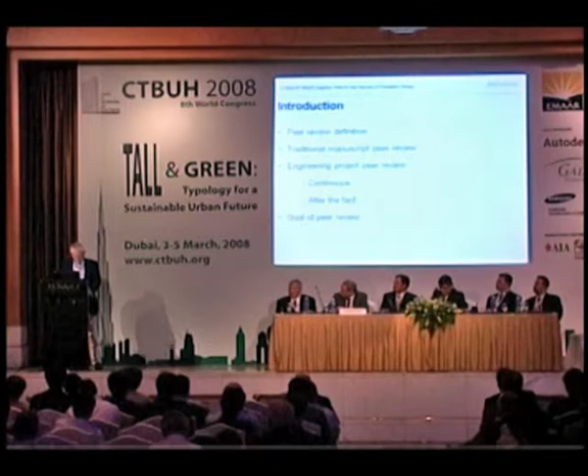At the same time, the peer reviewer must have integrity to speak his mind clearly on controversial engineering issues where there is a disagreement, even when his client prefers the view of the engineer being reviewed. This is particularly important in the geotechnical field where judgment plays a major role in arriving at the appropriate engineering solution. Why retain a peer reviewer? It is anticipated that retaining an appropriately experienced peer reviewer will help ensure that there are no major engineering mistakes or issues overlooked and the appropriate effort has been made to develop both a safe and cost-effective foundation design.

Because geotechnical engineering on which the foundation design is based is a mix of art and science, reasonable differences of opinion among geotechnical engineers based on their different experiences and training can be expected. Such potential differences can result in widely different foundation costs and performance. Appropriate peer reviews thus offer the potential to reduce both foundation costs and risks of poor foundation performance.

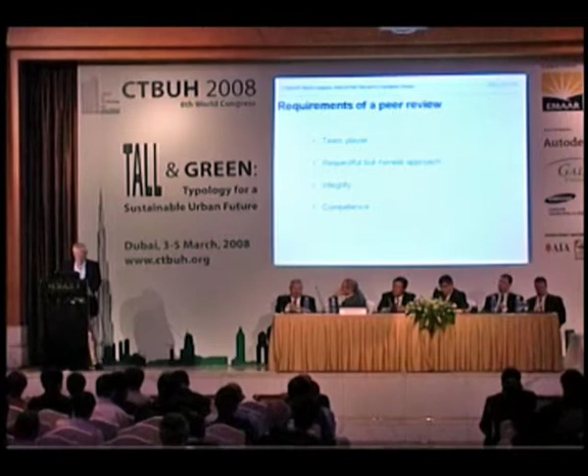Sometimes projects are set up by the developer so that the peer review consultant is retained at the same time as the geotechnical design firm. Sometimes the developer will require that the geotechnical design firm have an experienced peer reviewer as part of their team and be part of their proposal. At other times, the peer reviewer is requested after the geotechnical design is completed.

For a peer reviewer to submit a realistic budget in his proposal, it is necessary to have a well-defined scope with clarity and agreement on the goals of the peer review. The level of detail of review desired needs to be understood by both the peer reviewer and the party being reviewed, as the level of detail and level of required response will affect budget estimates of both parties.

First item is the concept designs. This is the best time for value engineering discussions so that all ideas for reducing costs may be considered early in the development stage. Subsurface exploration and laboratory testing program is the next stage. Understanding and agreement on the level of effort exerted in this stage is important.

There is a balance between the amount of geotechnical information, both field and laboratory, that can be obtained and the selection of the maximum geotechnical design criteria for most cost-effective design. Periodic desired team conference participation. It is helpful if the peer reviewer can participate in the foundation design conference meetings, workshops, along with the geotechnical engineer, structural engineer, and construction manager. The possible need for site trips for site conferences must be considered and the cost included if desired.

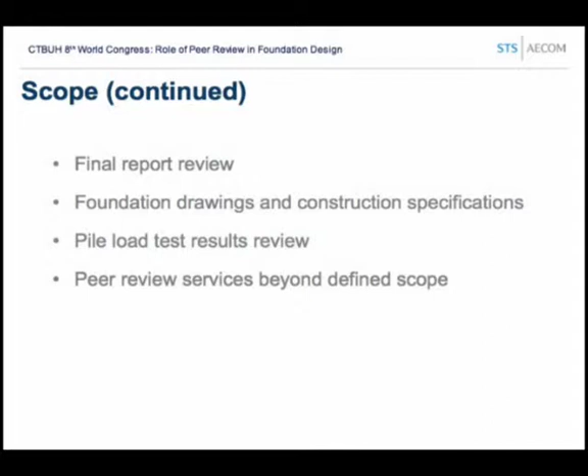Final report review. If the peer reviewer has been involved in the earlier stages as outlined above, the final report review amounts to a confirmation of what has already been agreed to. Foundation drawings and construction specifications. Since at this point all parties are in agreement with the foundation design, peer review is an opportunity to make any comments for improved clarity. If the peer reviewer has particular expertise and experience with the foundation system selected, a review of draft specification permits the opportunity for making any changes that might maximize clarity.

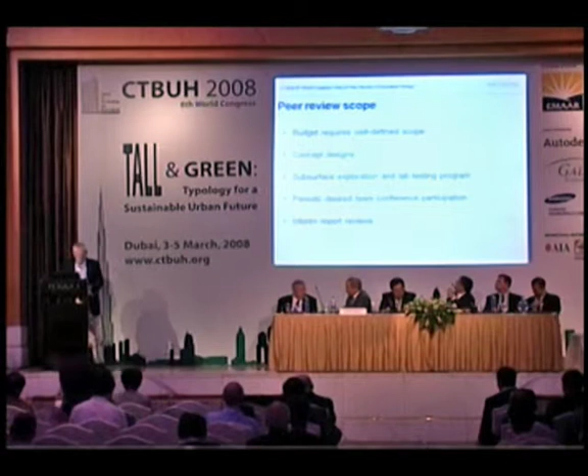Pile load test results review. Peer review of the pile load test results may be particularly important in the event that changes in foundation design may be required. Poor results may require lengthening piles at significant cost, or better than anticipated results may permit shortening piles for resulting savings.

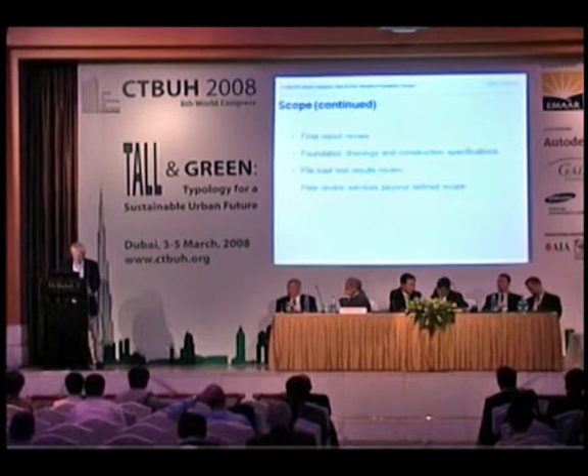Peer review services beyond defined scope. On occasion, when the peer reviewer has some particular expertise or experience that the design geotechnical engineer lacks, the peer reviewer's scope can be added to include actual design work or specifications development. This happened on one of the case histories described below.

Potential problems with peer review. Critics of peer review have concerns that competitive jealousies could obstruct objectivity and lead to efforts aimed primarily at enhancing one's own image and prestige rather than enhancing the project goals. Granted that this is a concern to guard against, it hopefully has not occurred on the projects in which the authors have been involved.

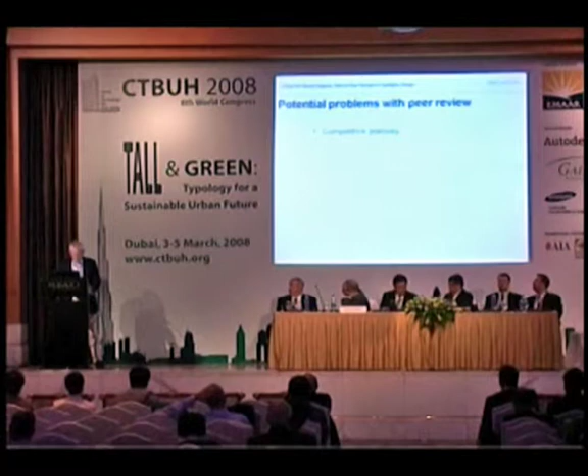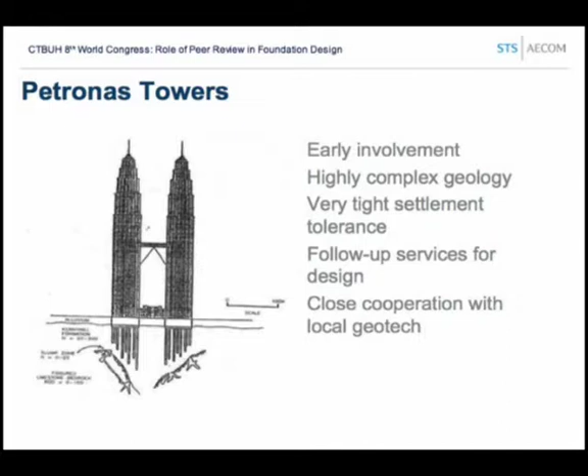The owner defined maximum allowable differential settlement across each tower of just 12 millimeters, and that made cost-effective foundation design very difficult in light of the site geology. The required tower location was immediately above a karstic limestone canyon overlain by siltstone and sandstones that had weathered to a very dense soil material. The canyon had very steep walls resulting in a relatively shallow depth to limestone on one edge of the tower and more than 200 meters at the center of the canyon between the two towers.

The peer reviewer was involved in all stages in the investigation and design as outlined above. The review involved two site meetings with the design team and local geotechnical engineering firm, and involved 6 trips working with the local geotechnical engineering firm. Details of the investigation, design, and observed performance in the structures are included in 2 papers listed in the references.

When it became clear that a major ground improvement program would be required to make safe construction at this site feasible, and due to the limited experience of the local geotechnical firm with regard to ground improvement, the services of the peer reviewer were increased to include development of a grouting program and the required ground improvement and development of specifications for the grouting program, as well as providing observation services during the 6-month grouting program.

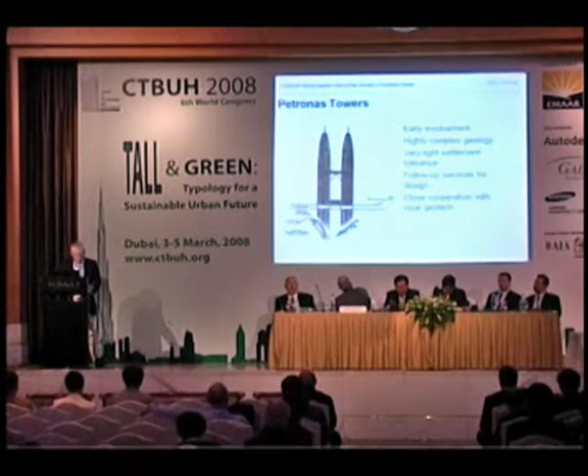This was a potential opportunity for competitive jealousies to arise, but through close cooperation with the local geotechnical engineers, any such controversies were avoided. Being involved at all stages in the investigation, testing, and design analysis helped develop the concept of variable length piles designed to accomplish the differential settlement criteria. The end result of the collaborative efforts of the parties involved was foundation performance that exceeded predictions, with total observed settlement less than predicted and maximum differential settlement of less than 12 millimeters.

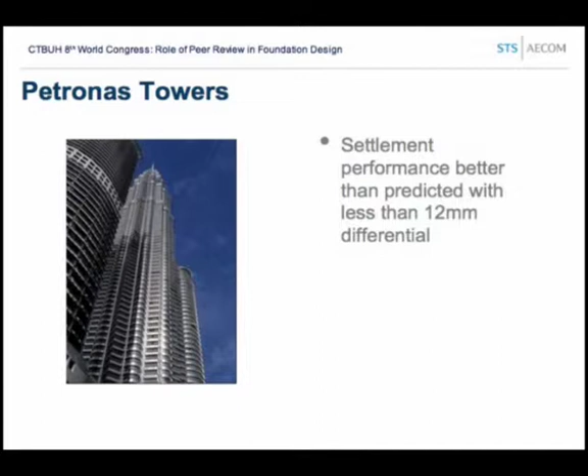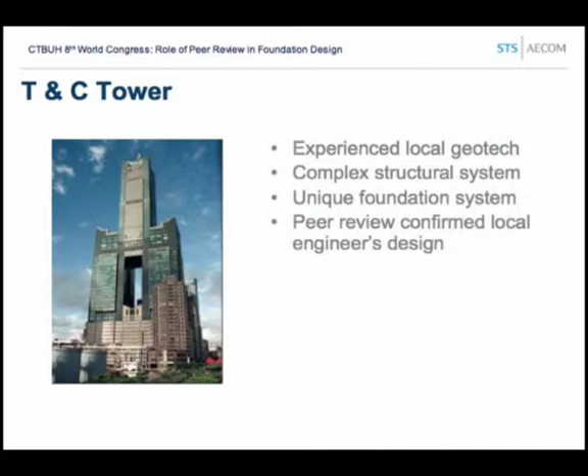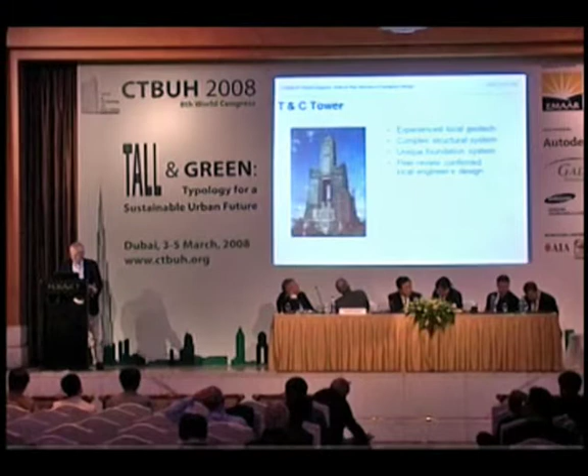Next case history is the T & C Tower, and I'll run through this briefly because I know we're short on time. Both this project and the next one, which is Taipei 101, had a very experienced local geotechnical engineer involved, and the peer reviewers were called in after the foundation design was basically completed. Fortunately, because of the competence and experience of the local geotechnical engineer, the basic designs were approved, and the projects were completed successfully. And in the case of the Taipei 101, they withstood a major earthquake during construction.

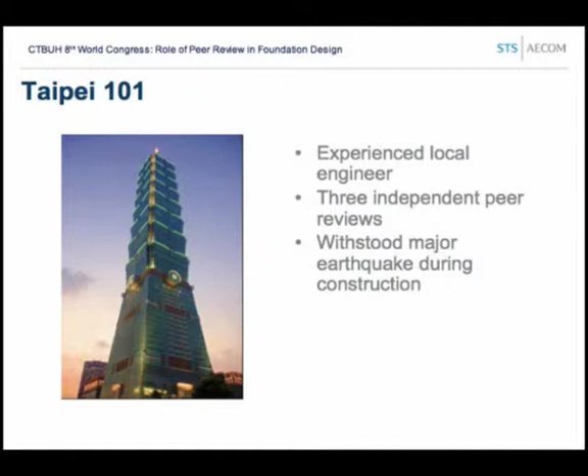Burj Dubai, that's what everybody's interested in. We all know it's unprecedented. It's the tallest building in the world, even as it stands. We don't call it the tallest building in the world yet because it's not completed, but it is certainly the tallest building in the world as it stands today.

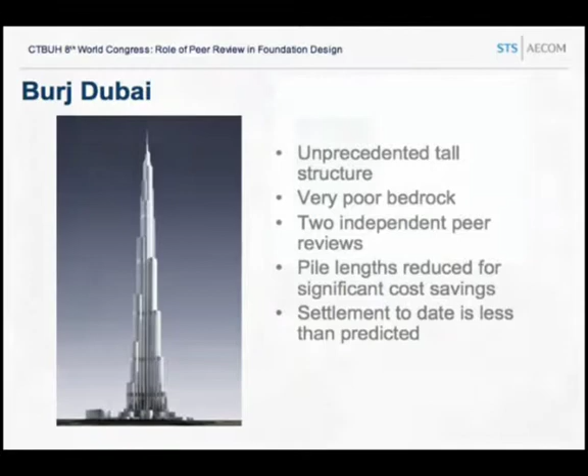It's built in an area where the foundations consist of relatively soft rock of variable strength and compressibility. The design geotechnical engineer brought on board an internationally recognized consultant to participate in the foundation investigation right from the beginning. In addition, the design architect and structural engineer retained their own geotechnical peer review consultant with whom they had many years of successful experience working together.

Both peer review consultants were involved from the beginning of the investigation and participated in design review conferences either by phone or in person. Major issues for review were the rock properties to use in the design friction and bearing, including the rock modulus for settlement prediction, the percent of load carried by the mat, and the length of piles required for adequate bearing capacity and tolerable settlement. Full-scale pile load tests were used to confirm design assumptions.

Through the process of peer reviews, it was possible to reduce the pile length modestly at significant cost savings. The pile load tests confirmed the conservatism of the design assumptions. At the time of writing this paper, with 80% of the total load in place, the observed settlements are below the most optimistic predictions of both the geotechnical design engineer and both peer review consultants. Clients always like to hear that the settlements are less than predicted, and we're very fortunate they are.

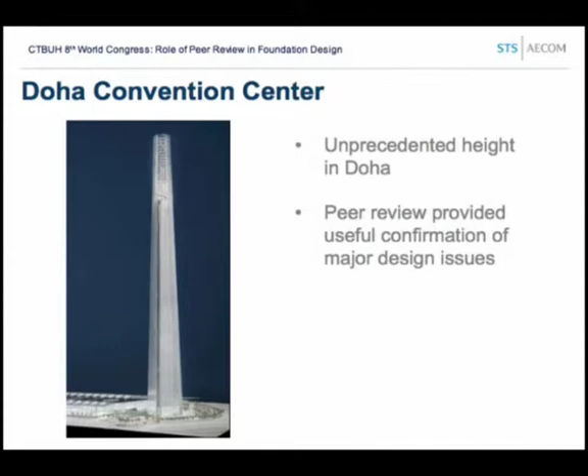The Doha Convention Center is a project that's just really beginning construction at this point. It's scheduled to be 550 meters tall, and as such will be the world's second tallest building. Proposals were requested by the construction manager for both geotechnical engineering design services and peer review services. STS Consultants Limited in their Dubai office was selected as the geotechnical engineering design consultant with a different internationally recognized

geotechnical peer review consultant. Thus, the peer review consultant has been able to comment on the different designs, on the different stages of foundation investigation, testing, and design, and is involved in most of the stages described at the beginning of the paper. We believe this review has been important and has permitted responses and modifications to be made while

the project is ongoing. The foundation system is a core mat with 4 smaller mats supporting super columns at the corners of the core. All mats are supported on bored piles. At the time of the writing of the paper, the pile testing program had been completed in the convention center and has now also been completed in the tower. Production pile installation is nearing completion in the convention center and will commence shortly in the tower.

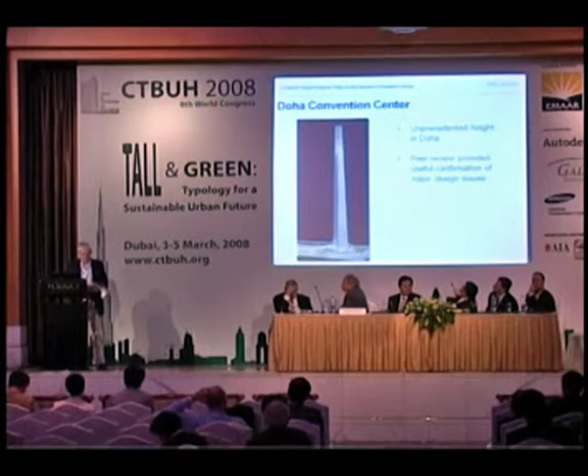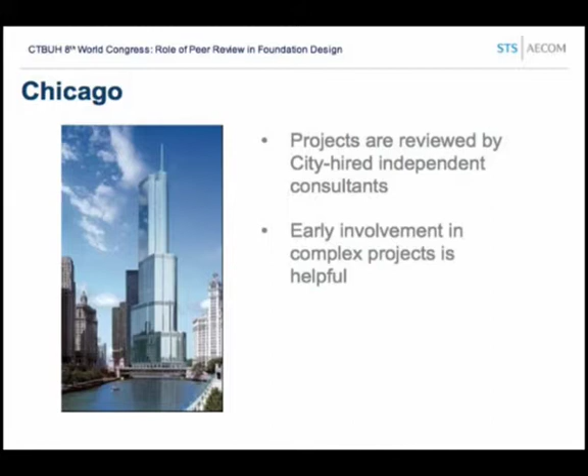Chicago. I couldn't give this talk without talking about Chicago. Along with New York and Dubai, Chicago is known as the skyscraper city, where at one time the city had 3 of the 4 tallest buildings in the world. Chicago has lost its title as having the world's tallest building, but is still building very tall buildings like the Trump Tower. In recent years, the city has installed a peer review process which the developer actually pays for, at

least in part. In the geotechnical and foundation peer review section, the reviews have often been performed after the foundation investigation and geotechnical report have been submitted for final foundation design approval. When the peer reviewer disagrees with the geotechnical engineer at this late stage and may want additional work done, it can be embarrassing for the geotechnical engineer who has to go back to the owner or developer for additional funds and explain the required delays.

Thus, this after-the-fact review is much less desirable than reviews which can be made early enough to be included in the investigation cost projections. Efforts are now being made to involve the peer reviewer at an earlier stage for his input if it should differ from the design geotechnical engineer's. Usually with the recent tall building projects, variations are required to exceed code values. This makes it even more important to include the peer reviewer early on with the request for code variance.

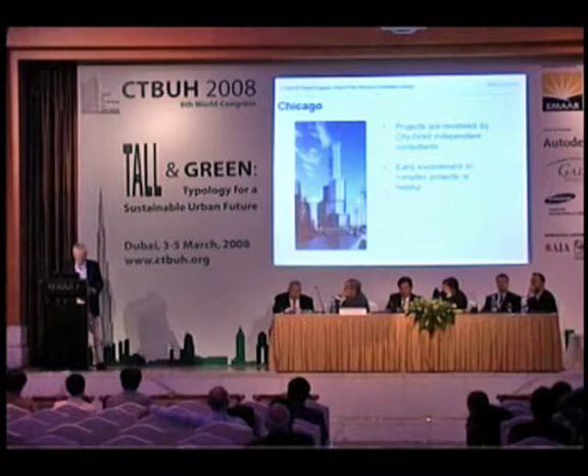Currently, the potentially tallest building in North America is under construction, and the city peer reviewer has been involved, sometimes informally, almost from the beginning. This approach leads to fewer surprises and happier clients down the road.

Conclusions. Peer reviews provide the most benefit for projects of large, unprecedented scale, which may be beyond the norms of local practice, and where foundation geology is complex. The best results are achieved if the peer reviewer is involved from the onset of the project.